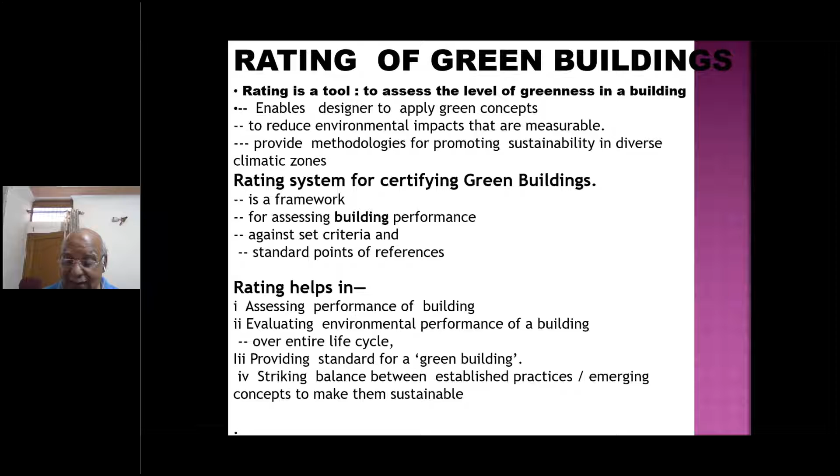Then it also provides the standard of what makes a green building, and then it is trying to invent new systems and materials within the system of green buildings, so that they are incorporated and that system remains always dynamic. In India we have 4 rating systems, I discussed with you, but internationally it started in Britain, but the first were the Americans who came in with their own system of rating, and this is known as LEED. Every country has a kind of rating system which is used for evaluating a building.

But in India, still we are having 4 systems, and because the government is not controlling that, maybe ultimately we come to one system, because then there will be uniformity, objectivity, transparency, and then comparative analysis of the buildings. It's not that 4 agencies are giving their own rating system and rating evaluation. That is not the essence. But all major countries of the world follow one system, LEED. The first was America. It is known as Leadership in Energy and Environmental Design.

So this is the United States Green Building Council, which is the agency trying to evaluate and evolve all these principles based on which green buildings are rated. England uses BREEAM, Building Research Establishment Environmental Assessment Method. World Green Building Council has its own system known as EDGE, Excellence in Design for Greater Efficiencies. Australia uses Green Star. Malaysia uses GBI, Green Building Index. Canada has borrowed from America and continues to use LEED, whereas DGNB is used by Germany and CASBEE is used by Japan. That's Comprehensive Assessment System for Built Environment Efficiency.

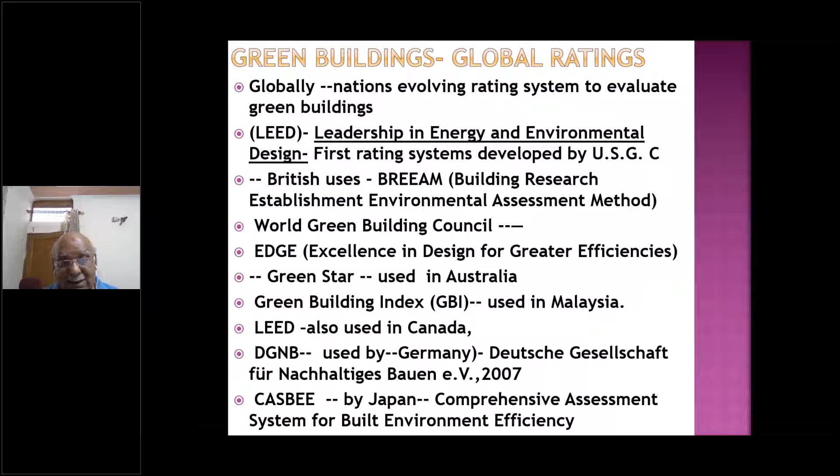Let me explain to you that basically the context of the buildings remains the same as what we have studied. It is only to what extent they go into detail, what are the peculiar circumstances existing in that country, that is included in the rating system. In India, the rating system came only 19 years back. It was in the year 2001 when Bill Clinton, ex-president of America, came to India. He is now promoting awareness of global warming, advising countries to check global warming. He's like an ambassador. When he came to India in 2001, he contacted CII and said, what are you doing with regard to buildings to make this world sustainable?

Then CII said, we don't have anything, in India there is no such thing. Then he insisted, since India is a big country. India remains number 4 in the world so far as carbon footprint is concerned, and India has a large population, number 2 in the world, holding 17.3% of the population. So therefore the implications of buildings are going to be very large. Last time we said India needs 700 to 900 million square meters of space annually, looking at the new buildings required for the growing population migrating to cities. He said India must evolve a system and the USA is going to help. So in 2001 the US Green Building Council partnered with CII and started a rating of buildings.

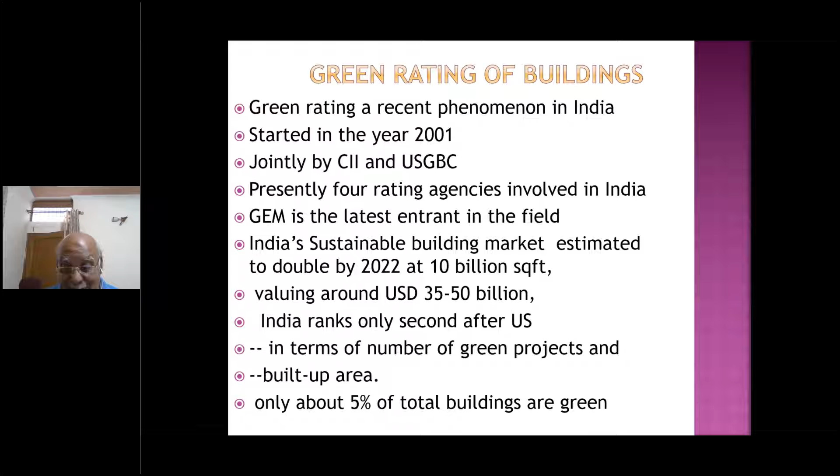And let me also explain to you, this is only 5% of the total built up area which has been made green. You can think of what can be the scope and the requirement for sustainability in this country so far as the built environment is concerned. There are 4 rating agencies in the country. IGBC, Indian Green Building Council, is the oldest. Then came GRIHA, Green Rating for Integrated Habitat Assessment, with The Energy and Resources Institute.

Then LEED, because LEED got separated from IGBC in the year 2014. After working for 14 years, LEED said we will dictate everything. But IGBC said no, we are mature enough, we can do our own system. Since we are in India, we know the Indian context much better, and we cannot allow the American concept to be enforced in India, because the climatic, physical and social conditions are totally different. So IGBC and LEED separated in 2014, and LEED said we will do our own business.

So USGBC now has a separate system, LEED. Basically IGBC and LEED are the same, but they vary in certain contexts and details, which we'll talk about. LEED is Leadership in Energy and Environmental Design. Last is GEM, by ASSOCHAM, another institution looking after industry and business, and they have floated a green and eco-friendly movement because they think it is good business, in addition to promoting sustainability. So there are 4 systems. Each system has defined criteria for rating, and buildings are rated by giving credits on those criteria.

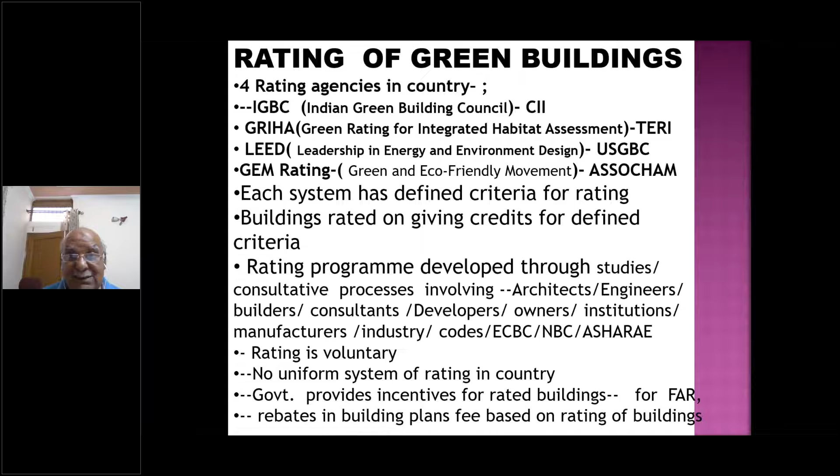So I said these are the 4 rating systems in India, and let me also explain what these rating systems are. IGBC accounts for more than 90% of the area rated green in the country. They have 7 parameters. There are 52 criteria on which the building is evaluated, 10 are compulsory and 42 are optional. There are 4 ratings granted: platinum is the highest, gold is next, silver is third, and last is certified. Minimum pass marks are 40. On a total scale of 100, you have to get minimum 40 marks to be certified, going up to 75 for platinum.

We'll discuss. And there are 26 rating systems available in the domain of IGBC, which touch residential, commercial, industrial, institutional, healthcare, schools, colleges, and then your villages, your cities, your railways, railway and bus stands; all these buildings have separate rating systems.

So there are 26 rating systems available. Next comes GRIHA, the Green Rating for Integrated Habitat Assessment. Do you know this came in the year 2006?

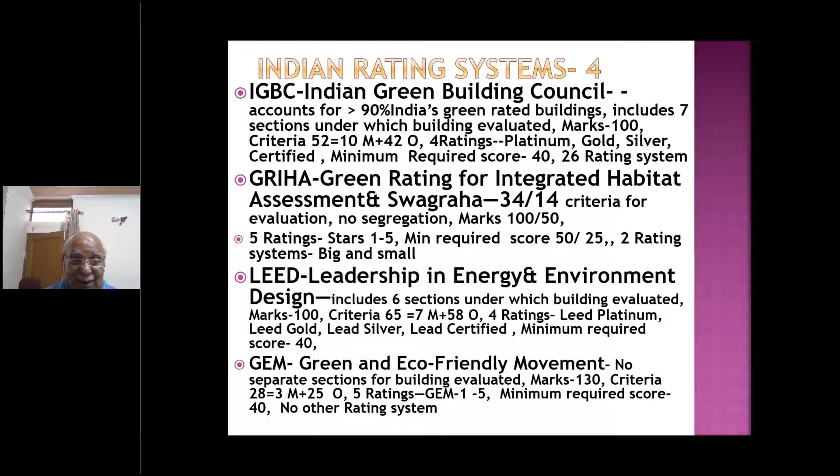In case of GEM, Green and Eco-friendly Movement, which is the latest entrant, they again have 28 evaluation criteria: 3 are mandatory, 25 are optional, and their total mark sheet is 130 marks. There are GEM 1, 2, 3, 4, 5 ratings given to you, and you have to score a minimum of 40 marks.

So let me repeat what we discussed, what makes a building green. Number one, working with nature — that means you have to design your building as a sustainable building, making the best use of your Panch Bhuta, the five major elements of nature of which this total universe is made: Prithvi, Jal, Agni, Vayu, and Akash. They are included as part of the evaluation.

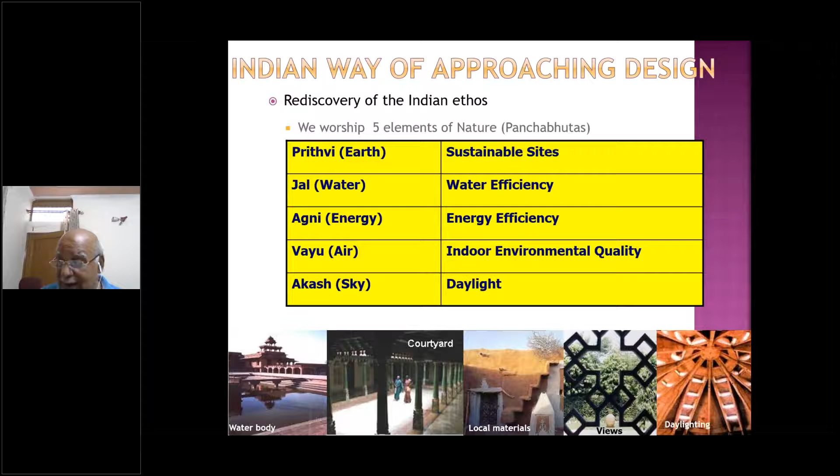Secondly, when we defined the green building, we said a green building tries to achieve five components: conserve natural resources, use less water, have maximum energy efficiency, generate less waste, and provide a healthier environment.

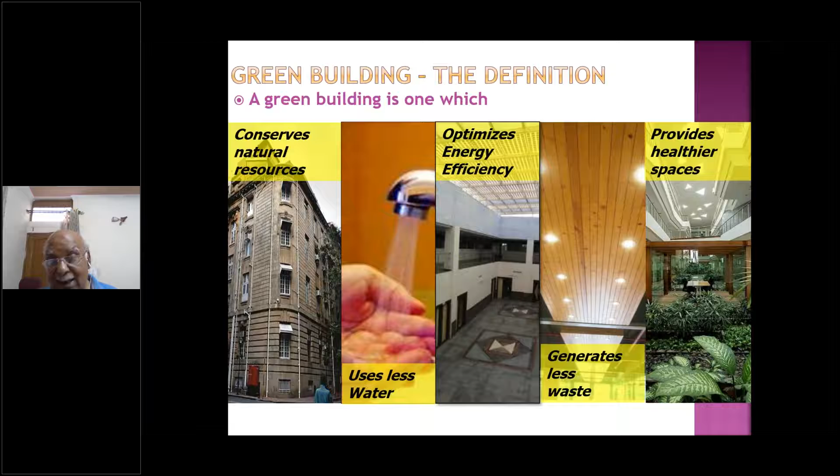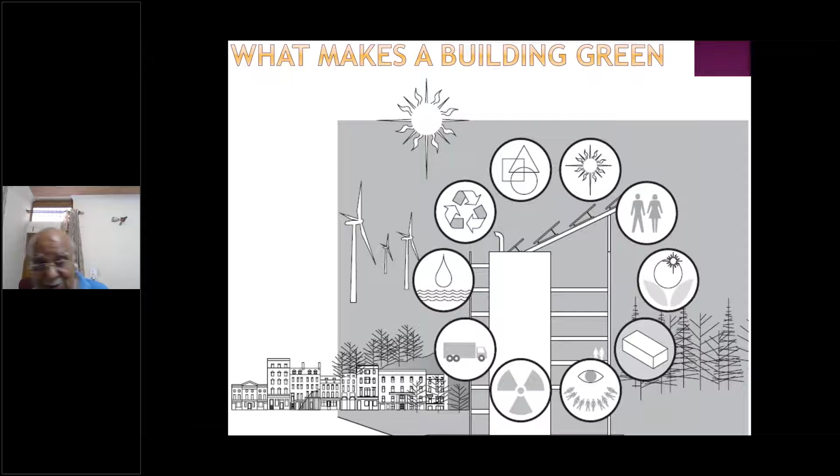Then we have the total system of what makes a building green: planning and design, climate, waste management, water efficiency, energy efficiency, material use, construction technology, indoor air quality, and innovations in how you handle the site, etc. Those were the components.

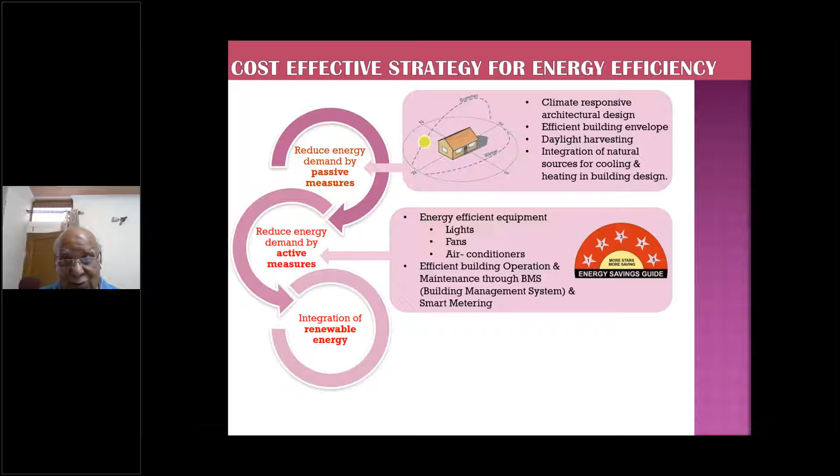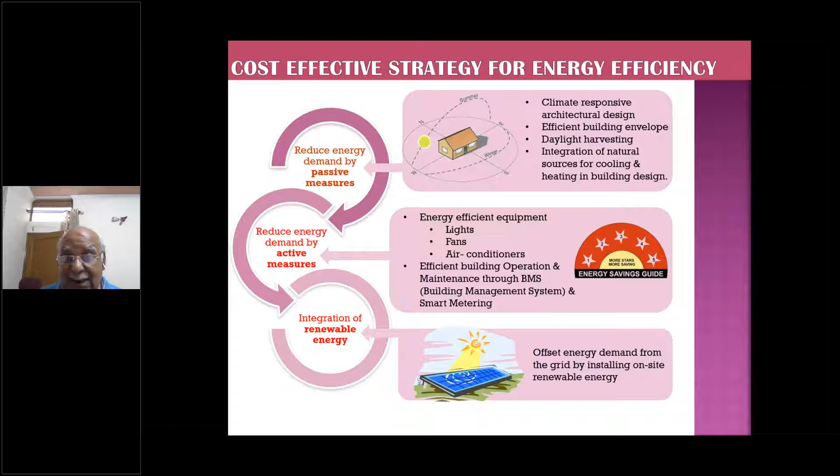And then we talked about energy conservation, that you can do it by three mechanisms: by passive design of building; then whatever fixtures you have in terms of light, fan, air, etc. are rated so they provide efficiency; and then how you generate electricity through photovoltaic cell, wind energy, biomass energy, or geothermal energy. Those were the issues we were looking at.

Then we looked at water efficiency — how much water you are trying to conserve through your equipment like toilets, urinals, and wash basins, how much you are recycling water, how much rainwater harvesting is done, and ultimately what landscaping you are trying to do. They are all basically what we look at.

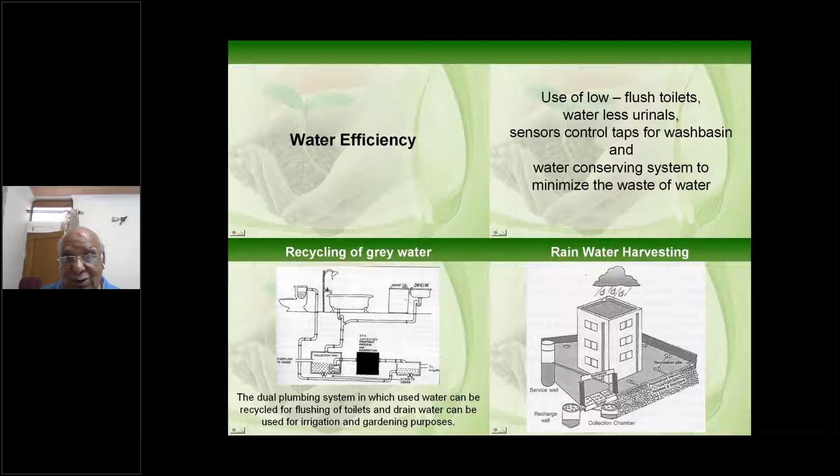Then we said you look at the materials which are made from waste, materials which are locally available, materials given by nature that can be reproduced, and materials that are not generators of waste, which minimize energy consumption and which don't basically eat away vital resources.

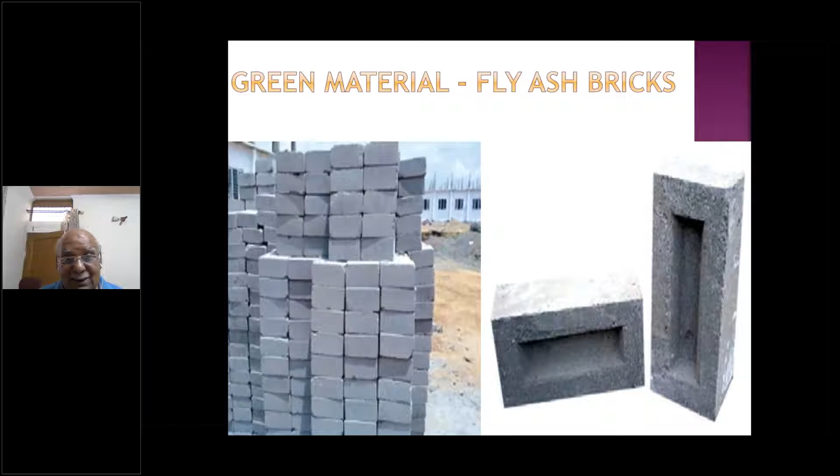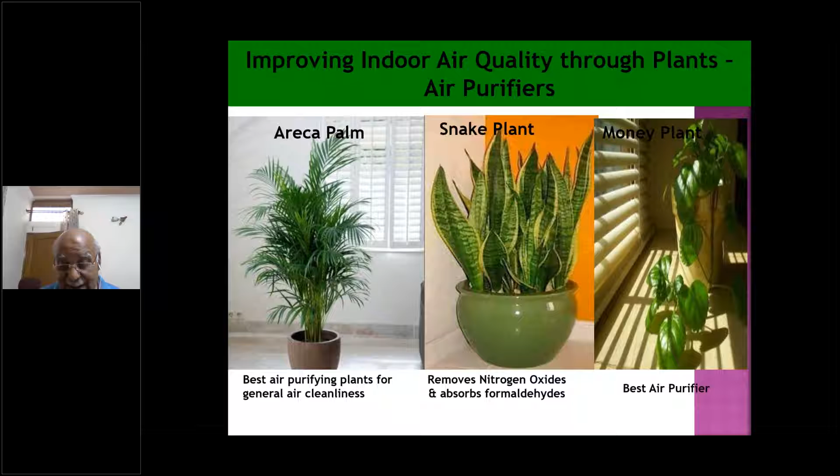Then we said you have landscaping, etc., the plants which help you out in improving your indoor air quality, besides ventilation, etc. So I think that is what we were trying to look at. And then we also said what are the benefits a green building tries to communicate with you — it was reducing energy.

When you're told your energy consumption is low, don't think you're being made uncomfortable. We're trying to reduce energy while giving you the same level of comfort. Don't think your AC will be set at 16 or 17 degrees—that's not the case. AC is required because your body temperature is optimal around 22 to 26 degrees. If you set it to 16 degrees, that means you'd need a blanket even in summer—that's not cooling, that's not human comfort. You must know the humidity and temperature to maintain. 22 degrees is the minimum; you should never go below that, and you can go up to 26 or 27 degrees, and energy consumption will immediately go down.

Then we talked about water consumption, and how it reduces the size of heating, ventilation, air conditioning, transformers, and cabling, because you're designing a perfect system for optimum performance at the local level. Once you're saving, you're reducing the operational cost of the building. And once you're not using conventional sources, you're not destroying the flora and fauna and other things nature has given you.

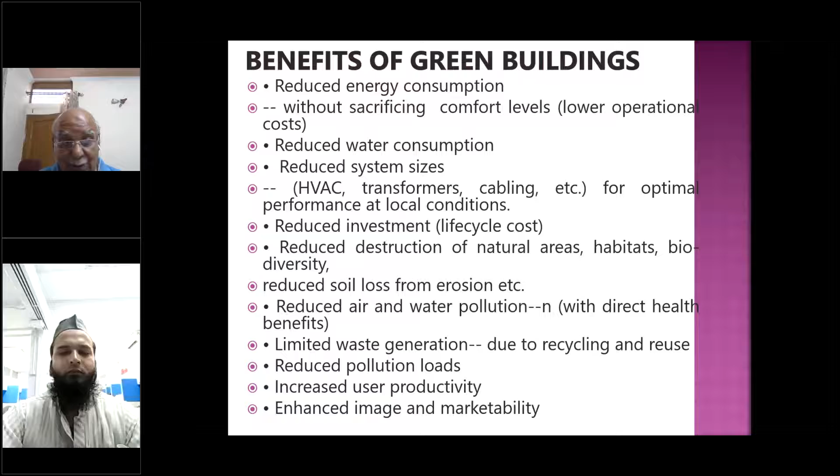So you're trying to reduce air and water pollution, minimizing waste generation and trying to recycle it. It's not a linear approach—it's a circular approach. In a circular approach, there is no waste, because what's left is again used as one of the raw materials. You're reducing pollution, and making people healthy and happy, improving productivity.

In addition, if you have a green building, you can get more rent. Understand that all multinationals coming to India, before hiring, will ask whether the building is green rated or not. They will pay more for the rent, but they know they'll save on water bills and electricity, because they're all running air conditioning, etc.

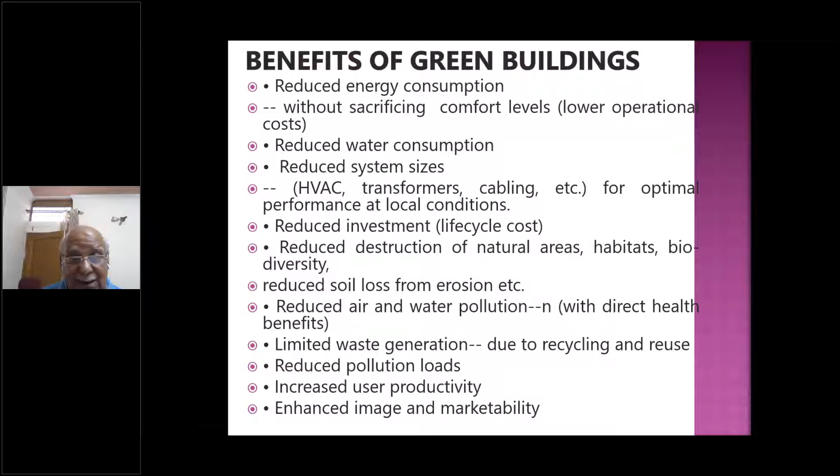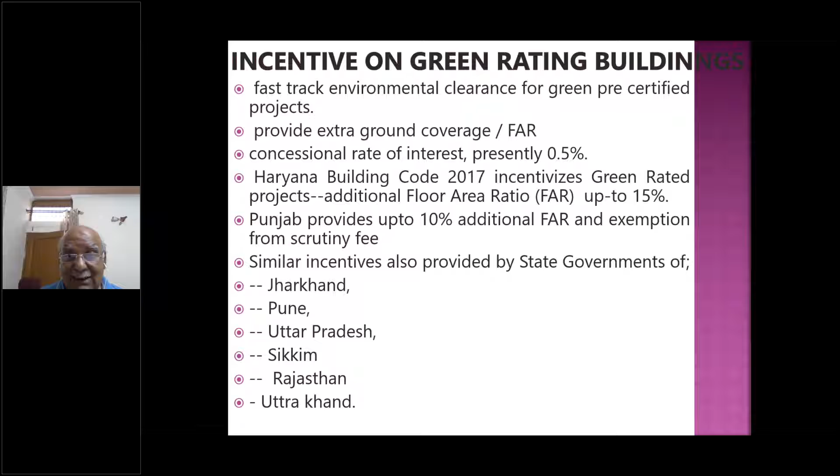Ultimately, the government of India is giving incentives in terms of FAR, rebates in plan checking, property tax, etc. So this is the context of the green building rating. Please understand these benefits are only available to buildings that are rated as green buildings by certified agencies.

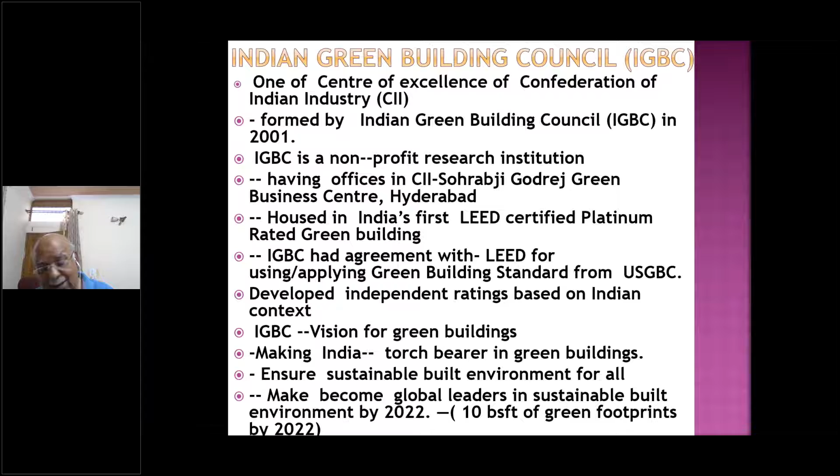The third motive is that India has to become the global leader in energy efficient buildings. By 2022 we will take over China and America, with 10 billion square feet of green footprint being created.

Look at this building - this is the first platinum rated building, the IGBC headquarters in Hyderabad. This building is now a zero energy building, and it's the highest rated building, with the rating done by USGBC at that time. It was inaugurated in 2001 and finished in 2003, designed by architect Karan Grover.

This was inaugurated by Dr. Kalam, our most revered president of India - he came to inaugurate this. Please look at this design, it takes care of all kinds of passive systems one could think of.

Look at the roof - you have photovoltaic cells, a green roof, a courtyard, and wind towers which cool the building. Then you have landscaping, proper orientation, and the entire water is recirculated. It was just barren land when it was handed over; now it is the most green land.

The sewerage is handled through phytorid technology. In phytorid technology, you do not have an STP. The solid and liquid waste that comes out from the WC is made to flow through a system of plants, and the plants take care of disintegrating and digesting the solid matter, ultimately giving you fresh water without using any mechanical system or treatment. This is known as phytorid treatment.

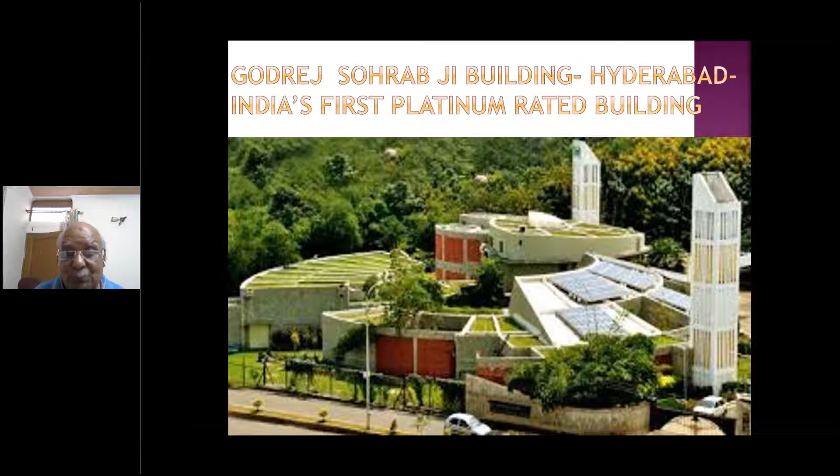So there are a number of innovations which can be explained. I said there are 26 rating systems, and a few are indicated here - for new buildings, existing buildings, green zones, societies, green interiors, hospitals, schools, factory buildings, data centers, green campuses, green villages, townships, green landscapes, SEZs, economic zones, green cities, and even railway stations which are rated as green.

And then MRT - Delhi Metro, their entire rapid transit, is rated as green. And then green affordable housing, and also other logistics that are there.

Let me also explain that these are the 7 things that go into making a building, and accordingly the rating, the extent of green rating, is evaluated on all these 7 parameters, each having sub-parameters which we will see. Broadly, there are sustainable architecture and design, site selection and planning, water conservation, energy conservation, building material and resources, indoor environment quality, and innovation development. Each has its own marks for overall evaluation, and buildings are rated based on this.

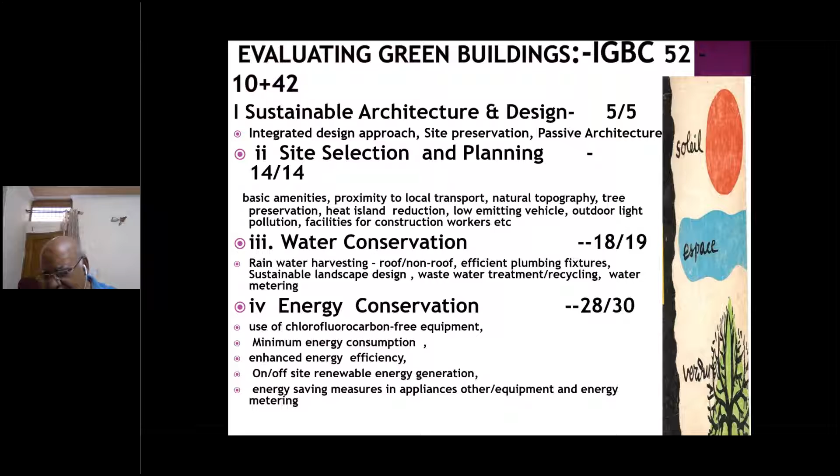So you divide the area into livable area, where human beings are to stay, and non-livable area. In a house, you have a bedroom, your drawing room, kitchen, etc., where you will invariably be. In an office, it is all your major office area which is going to be usable. Then there are non-usable areas: your garage, your stores, staircases, washrooms, etc. These are areas where not many people will go, and not for a long duration. So that is where you put them in an orientation.

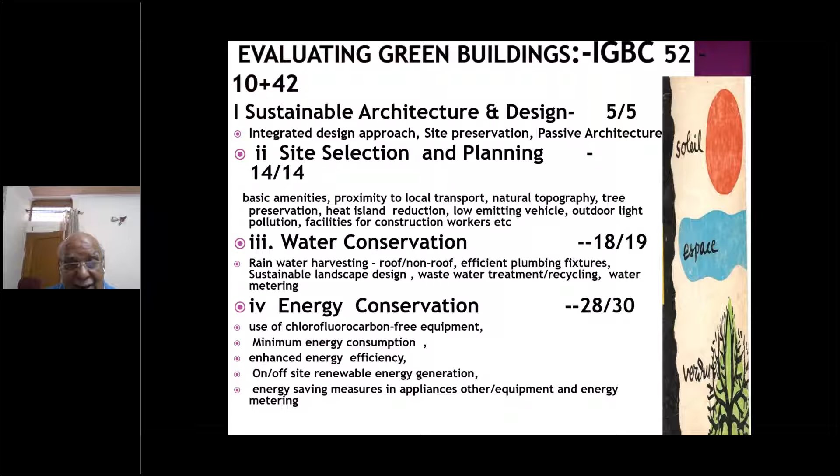Similarly, when you are doing a building which requires air conditioning or heating, please see which is the best option available, and put that area on that side. Then we come to building material. In building material, we are looking at how you are handling the material. What kind of material are you using?

I said use local material, use material in its natural form, and don't bring material which consumes high energy in its construction and manufacturing, where the raw material is taken out from 1,000 kilometers away, brought to a factory, treated, then transported to the site, and then used. No. Use whatever material is available close by. Then we are looking at how much material waste you are generating, and how you are reusing the waste.

Suppose you are trying to construct a building by demolishing an existing building. At that time, your architect has to do a great job. He has to first assess the existing building. What are the good products available here? Are there good doors, windows, almirahs, and other material which can be taken off? If the architect does a thorough job, he can do a great thing.

Earlier, teak was used. Now nobody uses teak because it's very, very expensive. Old is gold, in most cases, if done nicely. You have seen how the old buildings and old materials are, in terms of their workmanship, the quality of products, and their life. So if the architect does a wonderful job, during demolition they make sure that the usable material is taken off safely.

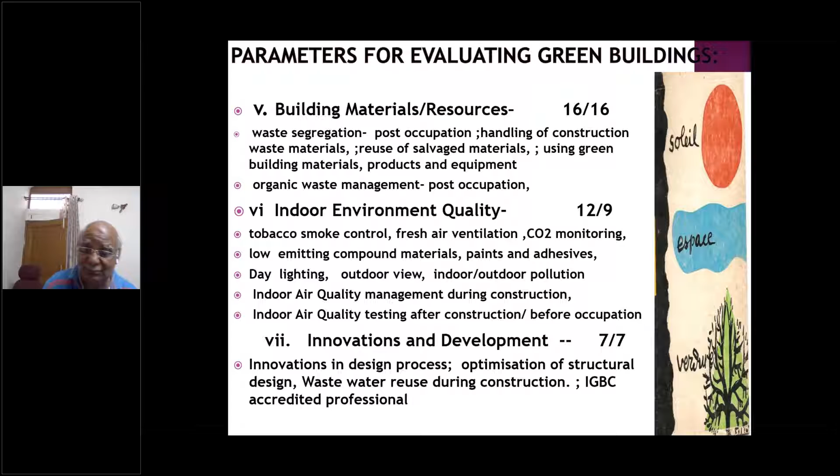In fact, in all these developed countries, they may take 2, 3 or 4 months to design your building. But once they freeze your building, they'll not take more than 1.5 or 2 months to construct whatever the house may be. You may have a 4,000 or 5,000 square feet house, a 6 bedroom house. They'll come and finish within 1.5 to 2 months, but only once you freeze the design. So this is what we are looking at.

So this is basically what I was talking to you about, how the 100 marks are divided. There are the 52 parameters which I mentioned: 10 mandatory, 42 optional. Then each parameter is given marks. Like I said, sustainable architecture and design has three components, and those three components have 5 marks: integrated design approach, site preservation, passive design.

Then site selection and planning has 14 marks, in which two are mandatory. That means under local building regulations, your building plan will have to be sanctioned. You can't start with unauthorized construction or a building plan which is not sanctioned. It's mandatory. You have to have a building plan sanction. That's number one.

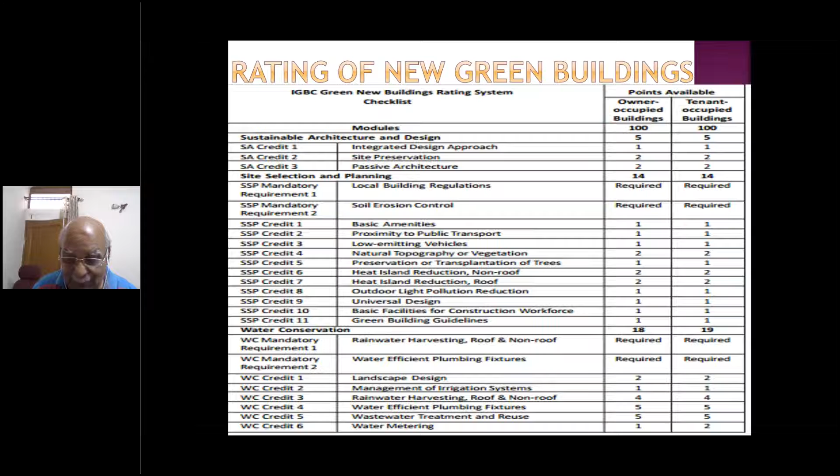Number two, you have soil erosion control. That means you are trying to place the soil which is taken out and protect it. And then there are 11 other criteria for which the 14 marks are there. Similarly, water conservation: water efficient plumbing, landscape design, management of irrigation system, rainwater harvesting, roof and non-roof, water efficient plumbing fixtures, water metering, etc. They all have 18 marks divided.

In energy efficiency, there are 6 components. In addition, there are 3 mandatory components: ozone depleting substances, the minimum energy efficiency you have to achieve, and a commissioning plan for building equipment systems, meaning AC, etc. And then you have 28 credits, of which the major credit of 15 is enhanced energy efficiency. Then for on-site renewable energy generation, 6 marks, and off-site there are 2 marks more. So therefore this is 28 marks.

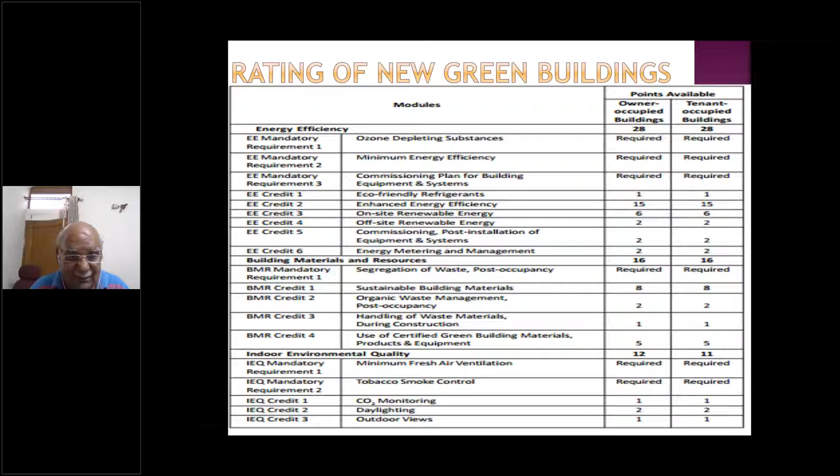Similarly, building material and resources: segregation of waste, then sustainable building material, for which you get 8 marks. There are scales, and details are already given on how they evaluate. Then for indoor quality, fresh air ventilation is a must, and tobacco smoke control is a must. Then marks are given for carbon dioxide monitoring, daylighting, outdoor views, minimizing indoor pollution, low emitting material, and occupant well-being facilities.

Like you have gym, etc. put in, for that its marks are given. Indoor air quality testing, indoor air quality management during construction.

And then there are 7 marks which you get in innovation. Innovation in design, 4 marks. Optimization of structural design, 1 mark. Water reuse during construction, 1 more mark. And if you have an IGBC accredited professional, you get another mark. So this cumulatively makes 100 marks, and there are 52 criteria on which you are evaluating each one.

It has to be seen, it has to be proved, and it has to be submitted by the person who wants to get it certified. And then it is done by experts' evaluation, and the total score is added. If you get minimum 40 up to 49, you get certified. That means you are already green, you have adopted the best practices.

For silver, 50 to 59, that means it's outstanding performance. For gold, you have to have a minimum score of 60, you can go up to 74. That means it's national excellence in terms of building. And if you are going for platinum, you will have to score a minimum of 75 marks. That means you are at the level of global leadership. So these are the 4 under IGBC which are being awarded.

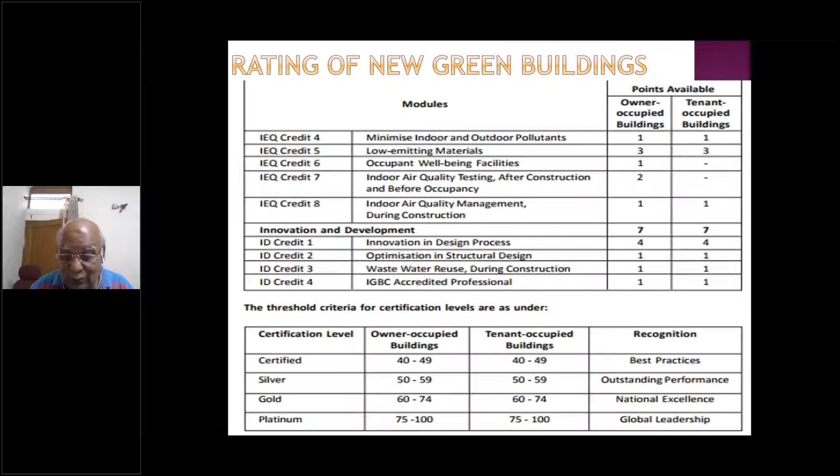So they'll ask you to get registered, then you get registered, because once you submit your registration that you want to have the project rated, they will give you a template, they give you all the documents, they give you all the calculations which are required to be done. They will ask for all plan, elevation, section which are to be submitted. Then they'll ask you what is the brief of the project, and that is made available. So after you have registered, you are given a template and all documents.

The project team, those who want to get it evaluated, will load those documents on the site which is made available. There's no human touch; you are making the submission online. So once you have made a submission, IGBC in-house will look at whether you have given all the documents. They'll see all the requirements have been fulfilled. That means whatever plan, elevation, section, reports, etc. are required, they are already there, approvals are there. You have already filled all the forms. You have completed the total project profile.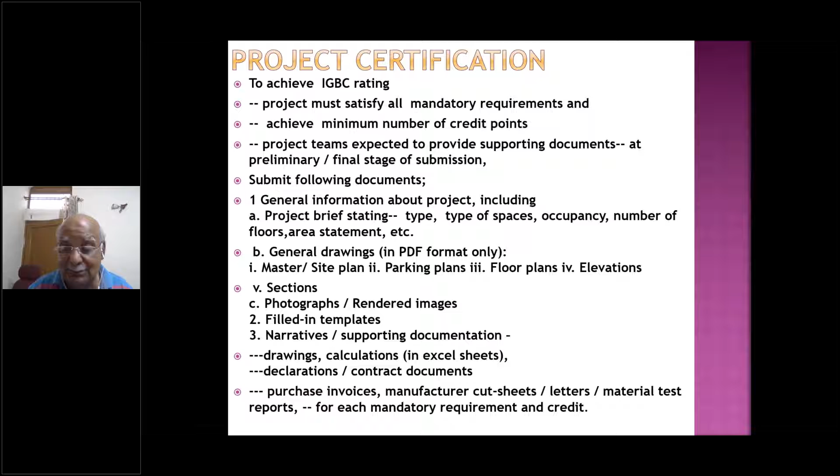There are declarations, there are contract documents, where you are buying; you have to give purchase invoices, which manufacturer you are trying to procure the material from, what is the specification of that product, then the letter of intent which you have issued or what the supplier has sent. Then the material test reports for new materials you have to give. So they are to be given for each mandatory requirement and the credits you are trying for.

So there are two kinds. The submission for certification is in two phases: preliminary submission and final submission. And the certification is only given at the final submission. In addition, IGBC has another kind of system. This is pre-certification, or provisional certification. That means, suppose you ask your development authority, I want to have a green building. They will say we will not give you the benefit of green building unless you get it rated through this. So the building is yet to be constructed, at the plan stage.

You can get pre-certification. There are projects which require Ministry of Environment and Forest clearance, and the Government of India said if your project is pre-certified by a green rating agency like IGBC, you will have a quicker clearance, because it has already gone through a process. So the builders are trying to promote that this project is a green rated building. How are they trying to do it before they start with the project?

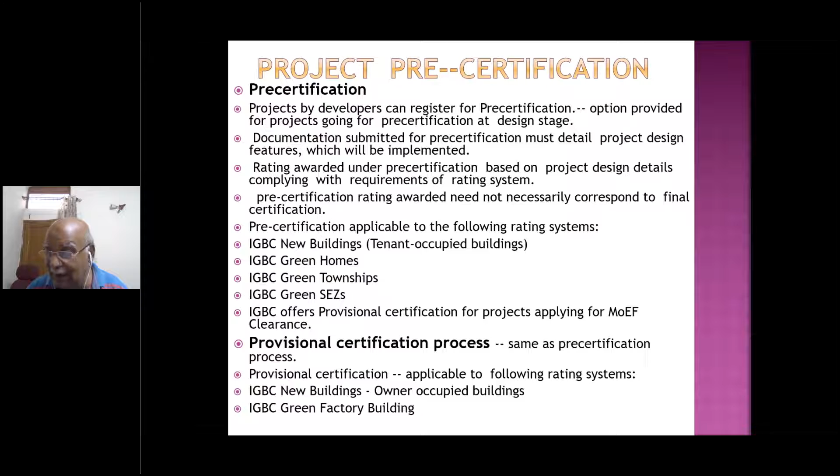Because they have got the pre-certification. In pre-certification you have to meet all the requirements, which is done. You have to specify, you have to give all undertakings of what you are trying to do, then that's all evaluated to what level you are certified, and that is given. And that pre-certification is available only for 3 years, and every 6 months you have to send a report that you are complying with this and this is what has been achieved.

And after 3 years, if you don't complete that project within this and get it rated, all those provisional and pre-certification ratings are taken off. You have to get it redone. So this is for pre-certification. It is the same: you do online project registration, then a preliminary submission of documents is reviewed by a third party, then you do the final submission, again reviewed, and then they accept it and give provisional pre-certification, which is valid for, as I said, 3 years.

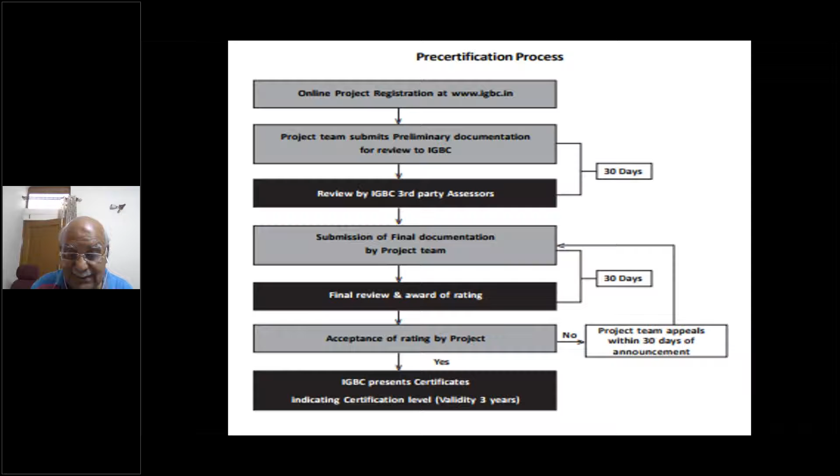So there is provision of appeal, that in case you are not certified, you can go for appeal, that you have been ignored in certain areas and you are eligible for more marks. They are all there, but this is rarely done because this is all a consultative process which is taken care of.

Cost remains in two kinds of system, for IGBC members and for non-IGBC members. If you want a pre-certification and provisional certification, it's a lump sum, 150,000 or 185,000, irrespective of the size of the project. But in case of others, it is divided into three slabs: if the project is less than 5,000 square meters of built-up area, then 5,000 to 50,000, and then 50,000 and above. In the minimum and higher, this is all lump sum.

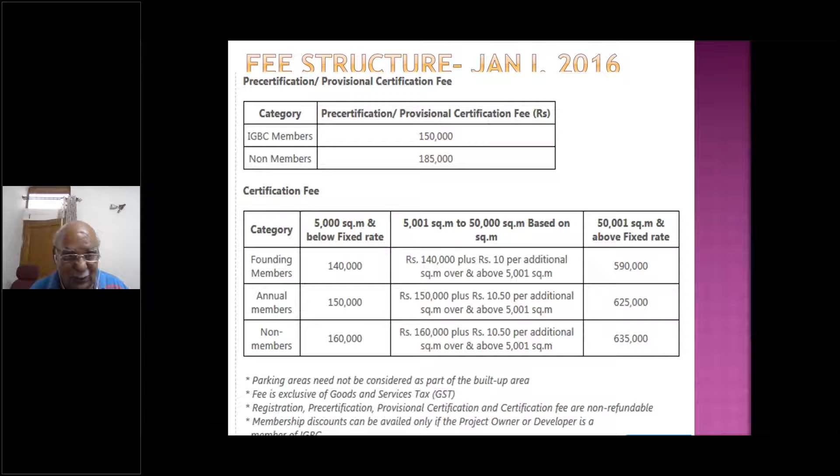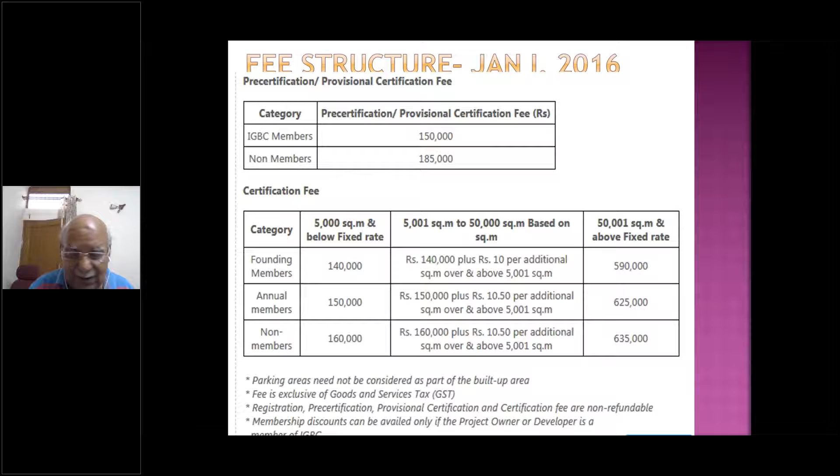That is, in case of below 5,000, if you are a member, you will pay 1.4 lakhs. If you are an annual member, 1.5 lakhs, and if you are not a member, 1.6 lakhs. And then in addition, if you are above 5,000, you pay 10 rupees per additional square meter above 5,001. And if you are above 50,000, the rate is a lump sum, 5.9 lakhs, 6.25 lakhs, and 6.35 lakhs. These amounts do not include the GST. So this is available for the various categories of registration.

First, we have finished with this. This is basically the ambit which remains for all kinds of things. I'll now quickly go through GRIHA. GRIHA is basically an evaluation system which was evolved with the Ministry of New and Renewable Energy and TERI, The Energy and Resources Institute. The government of India said we will also do our job. And this involves a three-tier process.

Number one, you have to get registered, you have to submit the documents. Before you submit the documents, they will also give you a kind of training. They will brief you before you start with the project: all participants, that's architects, engineers, owners, consultants, the people with mechanical circulation, HVAC, heating, ventilation, air conditioning, then all plumbing experts, structural engineers, they are all brought together. They are given training. They are briefed what makes a building green before they start doing this.

After they are briefed, for 1 day or 2 days, they will submit this, and after you have submitted this, you start with your construction, and there are three kinds of site visits which are done. Number one, when you are at plinth level. Number two, when you have already done all your civil construction. And third, after you have done your interiors, when the building is finally complete. The three visits shall be done to report what you are trying to do, and based on that, they will evaluate.

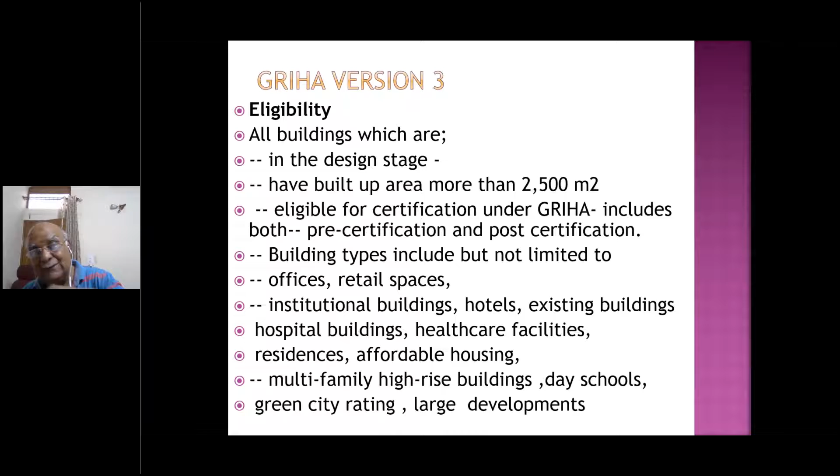That means it's a quick and efficient, simple system of evaluation. It is done quickly, and even the criteria listed are fewer—14 criteria, as against large projects which are more than 2500 square meters, for which there are 34 criteria on which evaluation is based.

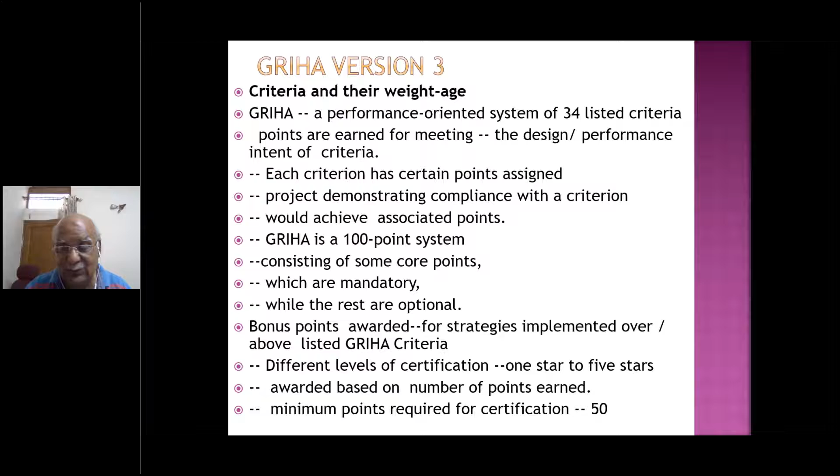GRIHA is again evaluated on a 100 point system for larger projects, whereas smaller projects are evaluated on 50 marks. Minimum pass marks required is 50 in a larger project and 25 in the smaller project. The rating is granted as star 1, 2, 3, 4, 5 — 5 being the highest star and 1 the minimum.

There are 34 criteria used for evaluation. Number one is site selection. Number two, preservation and protecting landscape. Third is soil conservation, then design. Then reducing hard paving on site, enhancing outdoor lighting system, planning utilities efficiently, and on-site circulation and travel.

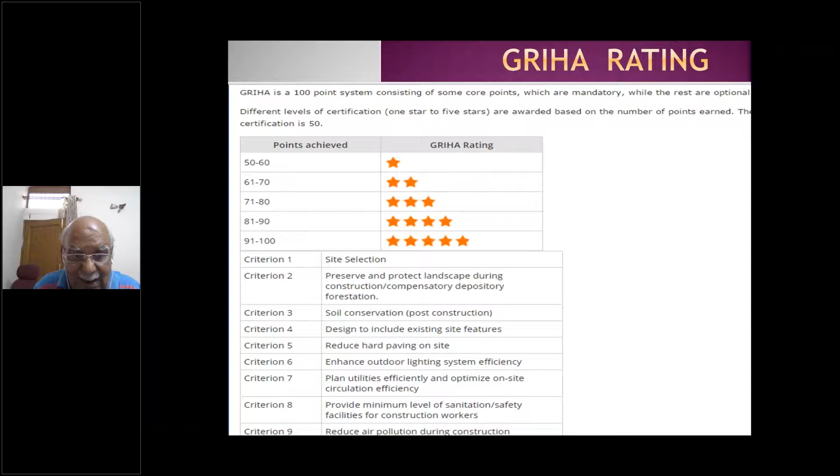Then minimum sanitation levels and promoting safety, reducing air pollution, reducing landscape water demand, reducing building water use, efficient water use, optimizing building design, reducing energy use, and optimizing energy efficiency within the building.

Then fly ash as a material or industrial agriculture byproduct for buildings, reducing embodied energy, using low energy material in interiors, renewable energy utilization, and if you have a water heating system, it must be based on renewable energy.

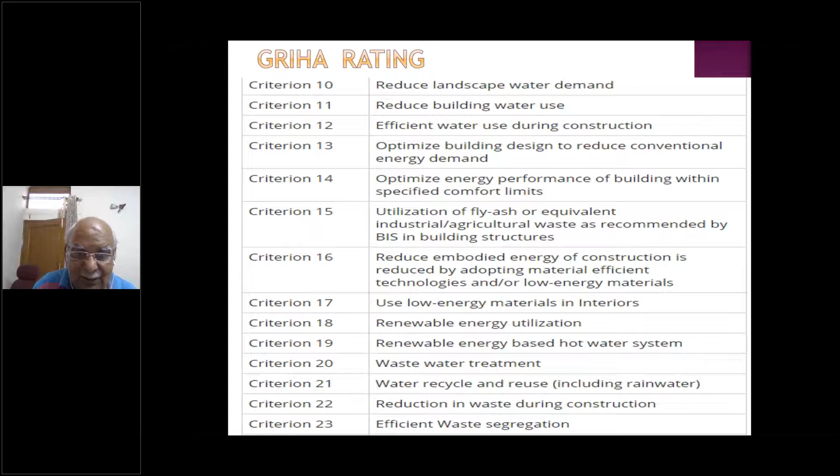Wastewater treatment, water recycling and reuse, reduction of waste during construction, efficient waste segregation, storage and disposal of waste, resource recovery from waste, and use of low volatile organic compound adhesives or sealants.

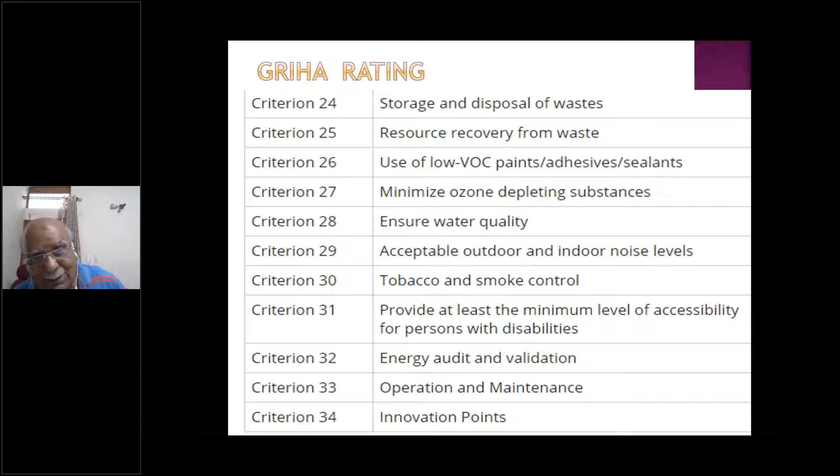Minimum ozone depleting substances, water quality maintenance, minimizing outdoor and indoor noise levels, and eliminating tobacco and smoke, with smoke control.

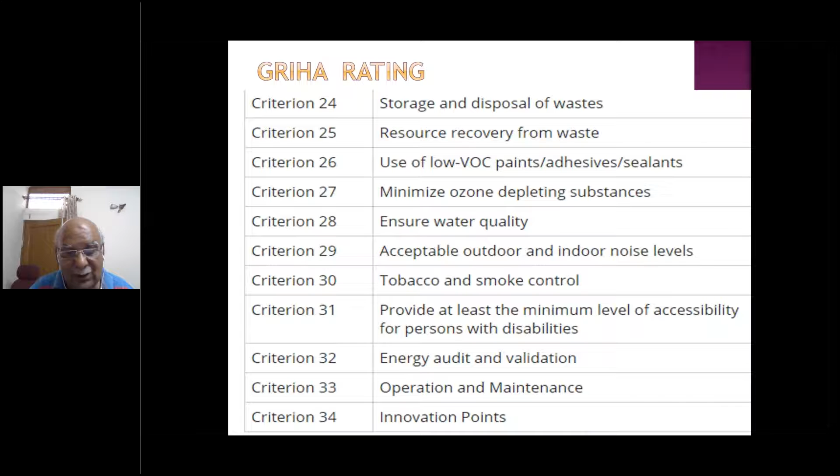We also have accessibility for people with disabilities — meaning the building has to be made accessible. That was not part of the earlier IGBC system. Then energy audit and validation, operation and maintenance, and innovations. These are the 34 criteria based on which buildings are evaluated.

The procedure remains: first, you register. Second, there is an orientation workshop for all the people engaged in planning, design, and construction. Then online submission of the documents, followed by evaluation, and then due diligence.

There are 3 site visits — first when the project is at plinth level, second when structural work is completed, and thirdly after the total building is complete, when the expert goes and checks it.

The experts include specialists in public health, landscape, solar passive design, architecture, building energy systems, renewable energy, and plumbing engineering. These experts go and evaluate, then they come back.

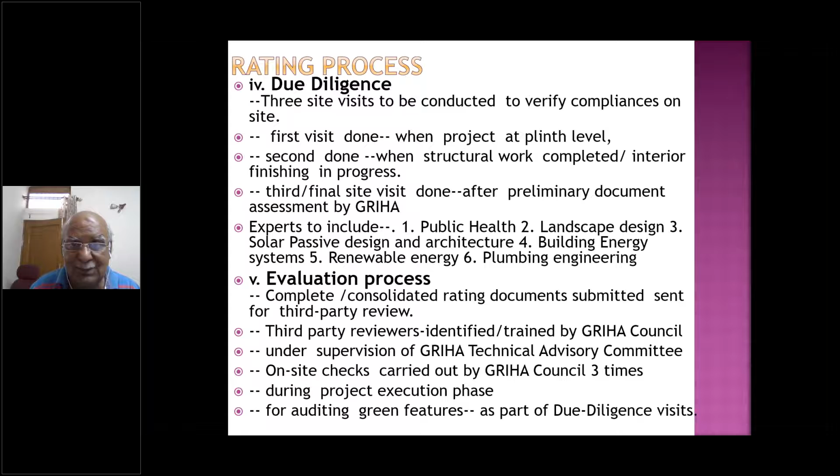The evaluation process is also done by an outside agency, so it's done in a more transparent manner. After that, in-house they check the score, and ultimately this is referred to the Technical Advisory Committee, which gives the final certification.

So the final certification is 1, 2, 3, 4, or 5 star. The cost: for 5,000 square meters they charge 3,14,000 rupees, and then 3.75 rupees per square meter above 5,000 square meters, whereas in the other case it was 1 lakh 40 thousand plus, coming to around similar figures.

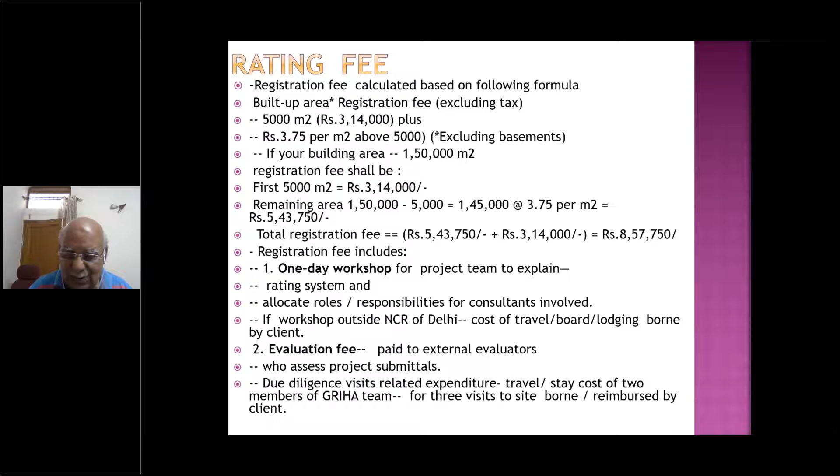This cost includes the workshop cost and the evaluation. For smaller projects of less than 2500 square meters, there's a system with 14 criteria and 50 marks, divided into five major categories: landscape, energy, water and waste, materials, and others — with marks of 6, 21, 11, 8, and 4 respectively.

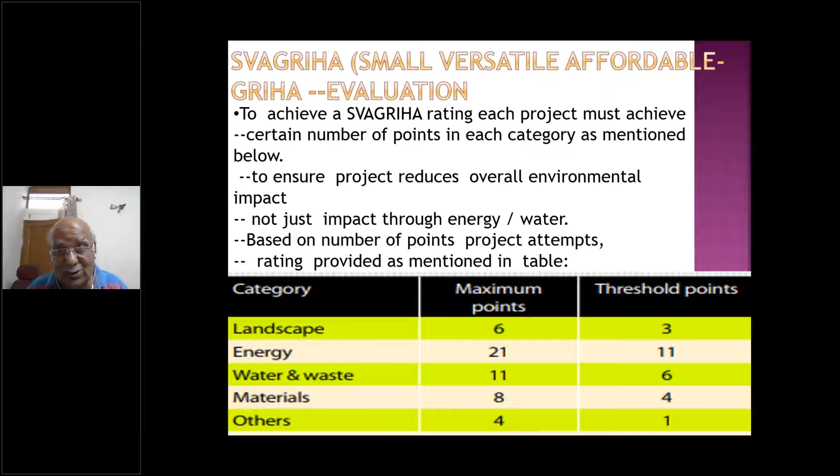You have to score a minimum of 50% in each category — it's not that you score high in one and skip another; you must score 50% in each case, and only then will you get certification. Again certification is 5 stars, but starting from 25 instead of 50, on a slab of 5 instead of 10 — so 25 to 30, 31 to 35, and so on, up to 5 stars.

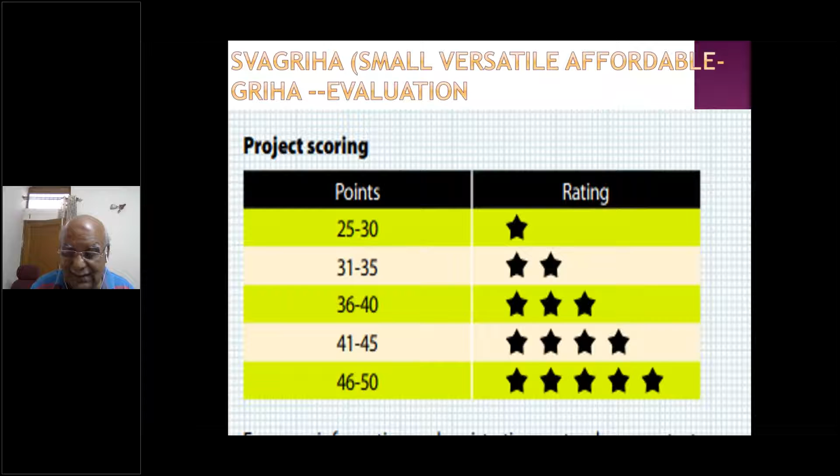In case of leadership and LEED, which I said they were the first who started the system with IGBC. They came back after the year 2014 because there was some conflict between IGBC and USGBC, because USGBC said we will dictate this. So ultimately it was said, let's part and do our own things.

So they are starting, but they modified their own system. They remain by and large what IGBC is. Evaluation remains on 100 points, no problem. Whereas in case of IGBC, there are 52 criteria, 10 mandatory, 42 other. Here they have increased into 65, that is 7 mandatory and 58 other.

The 6 major criteria on which the building is evaluated remains same. It's site, water efficiency, energy efficiency, material resources, indoor, and innovation and design. In addition, instead of 7 marks, they are giving 10 more marks for your innovation in the design and considering this.

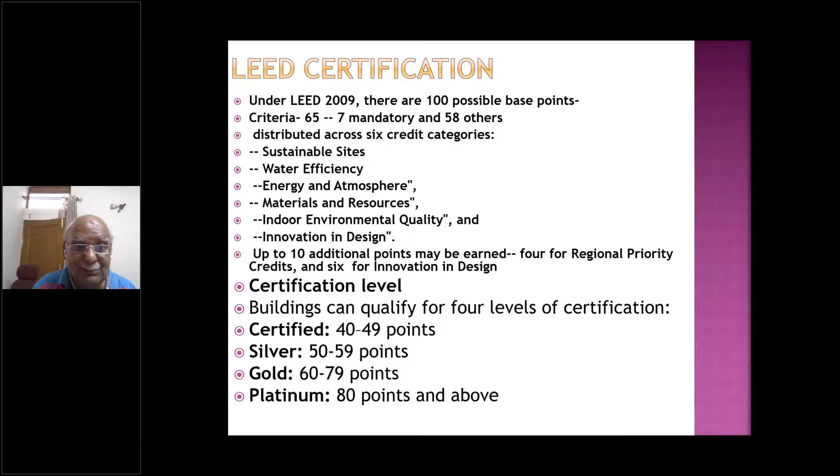But they are also following the pattern of 4 kinds of certification, that's LEED certified, LEED silver, LEED gold, LEED platinum, and they also follow the same thing. For 40 to 49, they give you certified. 50 to 59, they will give silver. But in case of gold, IGBC was doing 60 to 74, they are taking it 60 to 79. And in case of IGBC, it was 75 and above when you get platinum, whereas in this case, you have to score 80 marks under LEED.

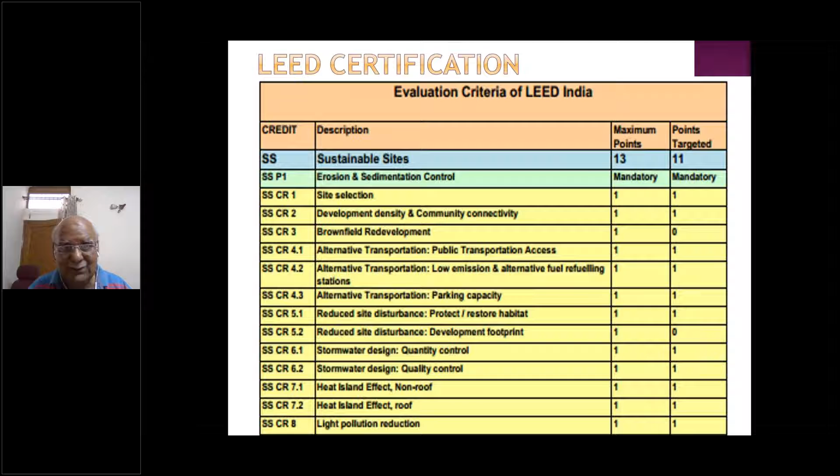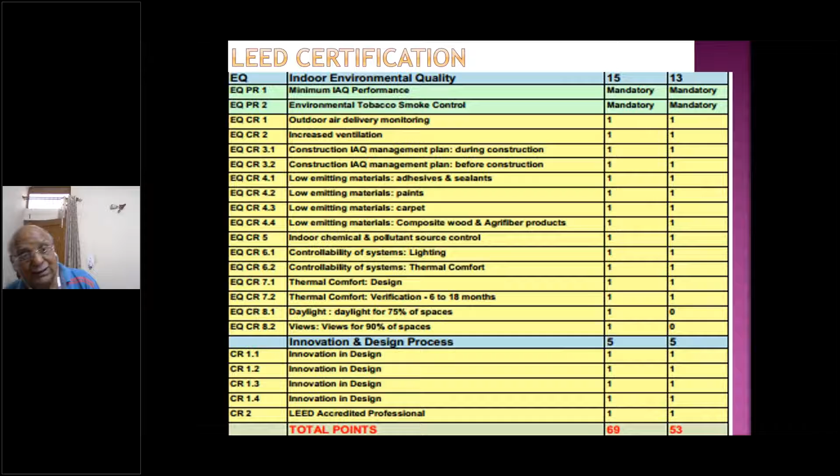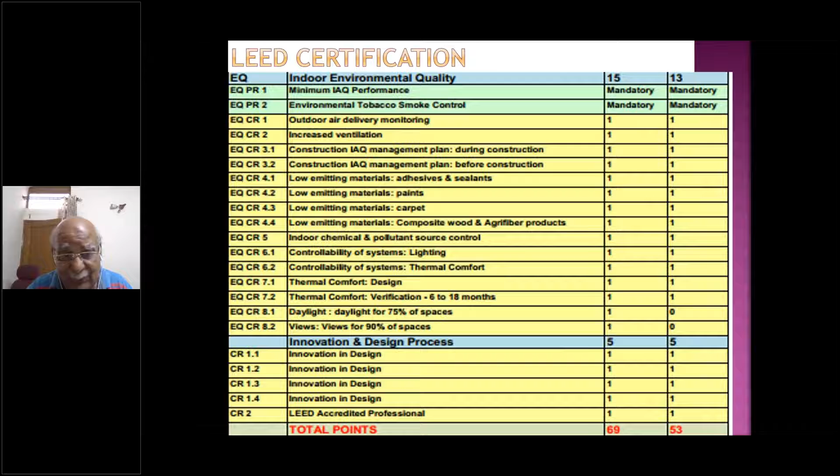So this is their system, following the system of site, water, energy, material, indoor, and then integrated approach to this. So these are the 65 parameters which I've tried to explain in terms of sustainable site, water efficiency, energy efficiency, material efficiency, and then indoor environment quality and innovations. Of course, this is more detailed, and they have certain more details and certain aspects. They are focusing more on materials, and then daylighting, etc. The marks also vary, the weightage also vary, but by and large, they follow the same kind of principle which are used in greening the building.

So these are the 4 certifications, that's LEED certified, LEED silver, LEED gold, and LEED platinum. Last remains is the

GEM rating. I said this is the new entrant, they just entered about a year back. And this is, IGBC was launched by CII, this is launched by Associated Chambers of Commerce and Industry of India. And again, I said they have one certification system.

They are looking at all these things which we have already discussed. They are looking at the codes, the planning, design, energy, water, material, and indoor efficiency. And they are also basically evaluating all kinds of systems, buildings through only one evaluation system, not 26 in the case of IGBC, and 7 in the case of GRIHA.

It's trying to look at both existing as well as proposed buildings. So it's a rating system which is again becoming a reference guide for the architects to design and also for the agency to evaluate it. They also follow the system of pre-certification, provisional certification, and final certification.

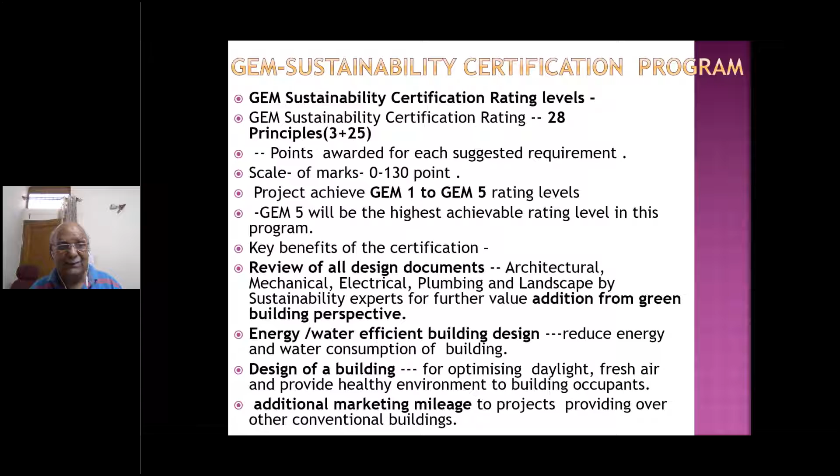They are also awarding certification in terms of like stars. Here it's gems. GRIHA is doing stars, but IGBC and LEED, they are doing platinum, gold. Here they are stars. Here they are making it gem 1, gem 2, gem 3, and gem 5, and they are basically looking at what they call the principle of design, water and energy efficiency, and then indoor air quality. And these are the 28 principles which they are talking about. Three are essential.

Number one, government approved plan, then construction management and best practices, and parking for building occupants, and then landscaping, then preserving trees, then building material, rainwater harvesting, low flow fixtures, on-site treatment of wastewater, irrigation best practices, energy and water consumption, post-occupancy waste management, on-site conversion of organic waste, and then amenities for fundamental needs and daily commute, best practices for building design, exposure to volatile organic compounds, and sustainable development of construction engineering practices.

They are looking at local materials, the use of hardwood and softwood, and energy management best practices, then efficient electric equipment, then using renewable energy sources. They are promoting optimum use of natural light, healthy indoor air quality, training and capacity building of the project team, then linking corporate social responsibility activities.

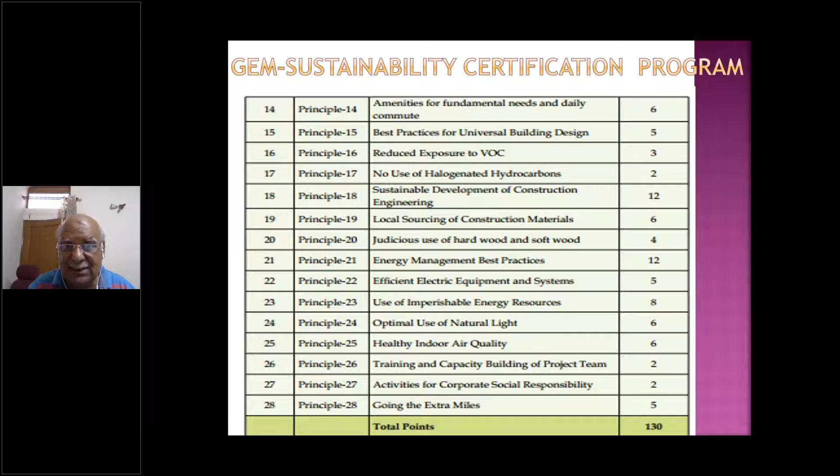So with that, I conclude, and I have tried to explain in brief the total ambit of rating. Of course, this requires so many things, that you need full training to come to the basic conclusion of how things are rated. There are many things you have to go through, and because of the limitation of time, I'm only trying to tell you the principles.

I'm trying to tell you what goes into the rating of these buildings, and we have to do our system in such a manner that buildings are rationally evaluated. We have a transparent system, we have all the things which are used in making a green building, and you have to very carefully evaluate and lay down the system so that it does justice.